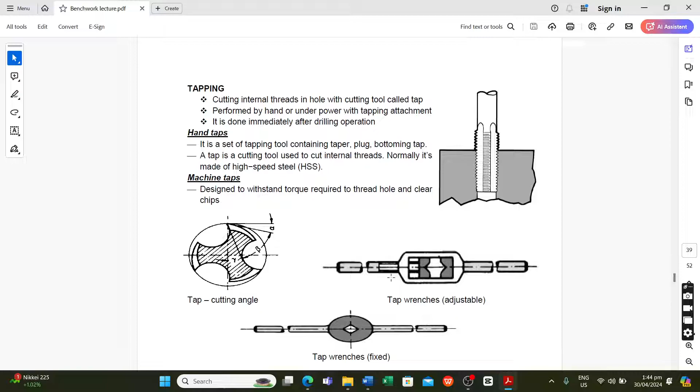Okay, so ang ating topic is all about tapping. Is it visible? Visible siya. Okay. So ang ating idea is when we say tapping, it is cutting internal threads in a hole with a cutting tool called tap.

So we will use what we call tap and die. In the video presentation that I will share, gagamit tayo ng 3 types of tap: tap number 1, tap number 2, and tap number 3. So syempre, tapping can be done kung meron na tayong existing or drilled holes. Kung meron na tayong nagawang butas through the drill press or electric drill, pwede na tayong gumawa ng tap. So ang purpose ng tap is para magkaroon ng thread, parang rethreading.

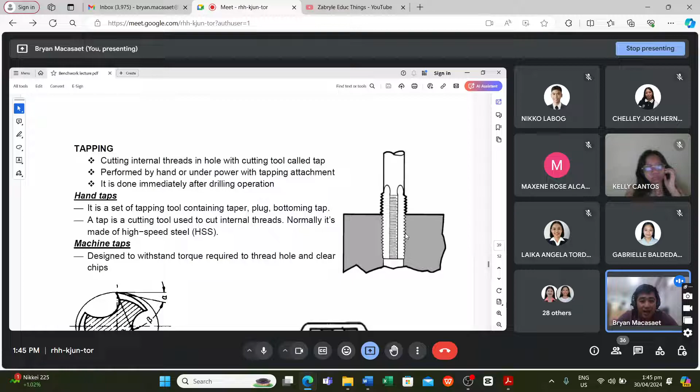So it is performed by hand or under power with tapping attachment. Also, it is done immediately after drilling operation. So meron tayong hand taps na tinatawag at saka machine taps. Pag sinabing hand taps, it is a set of tapping tools containing taper, plug, bottoming tap. So a tap is a cutting tool used to cut internal threads, normally made up of high-speed steel.

Okay, and then ito yung ating materials na ginagamit. We have the tap cutting angle and the tap wrenches. So if we will compare taps with drilling and countersinking, ito yung itsura.

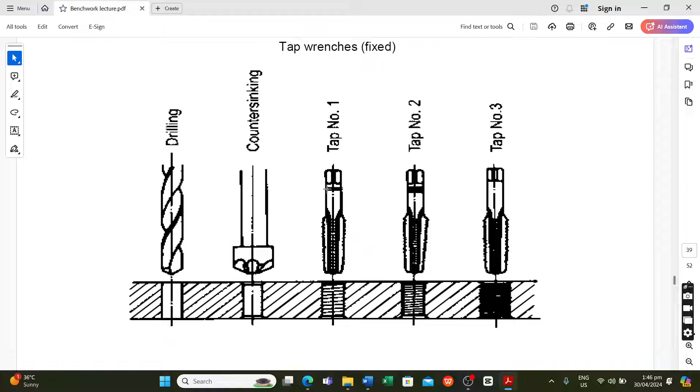Ang purpose ng drilling, syempre, initially is to create the initial hole. And then yung countersinking is the enlargement of the top side of the drilled hole wherein kailangan tayong makapag-form ng conical shape para mag-fit yung head ng ating screw. Yun yung purpose ng countersinking. In tapping naman, we create threads. So as you can see, we have tap number 1, tap number 2, and tap number 3.

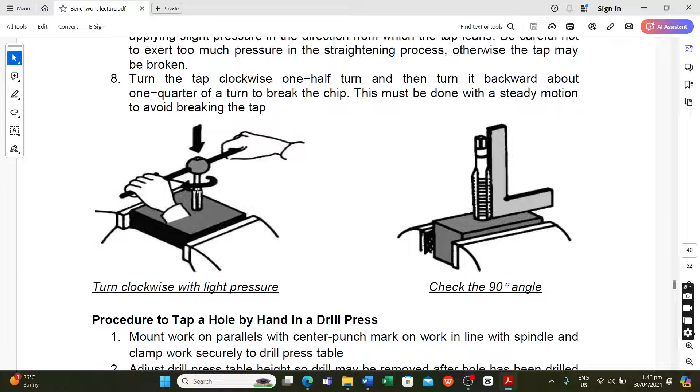So what are the steps in creating hand taps? As you can see in the picture, yan lang yung pinakasimpleng paraan para maintindihan natin kung ano yung tapping. So the first one, we must select the correct size and type of tap for the job. Syempre, kailangan alam natin yung size ng hole, at alam natin yung ating gagawing butas, kung gaano kalaki.

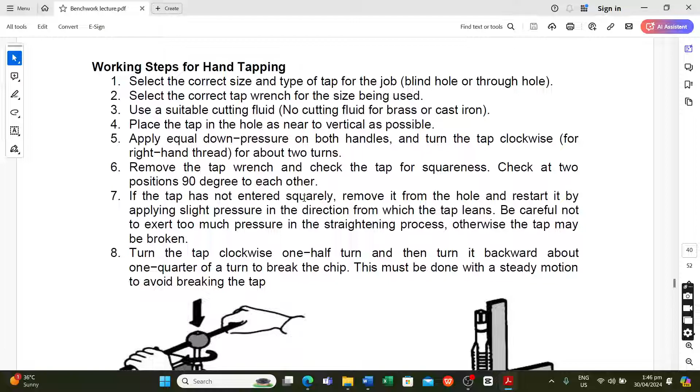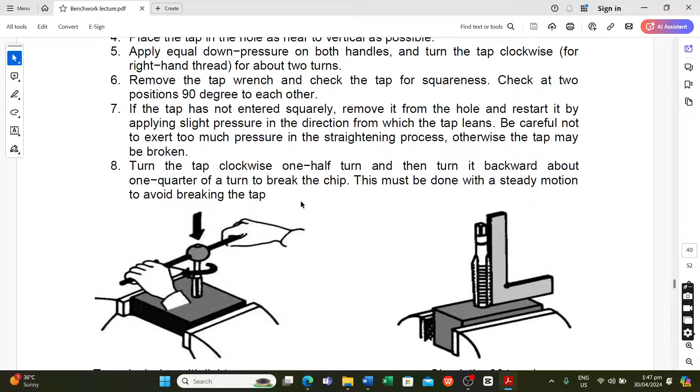Number 2, select the correct tap wrench for the size being used. Number 3, use a cutting fluid. Number 4, place the tap in the hole and apply equal down pressure, ikot-ikot lang pababa, and remove the tap. If the tap has not entered squarely, remove it from the hole and restart. Then, turn the tap clockwise half a turn and turn it backward about a quarter of a turn to break the chip. This must be done with a steady motion to avoid breaking the tap.

So ito yung ating proseso. Turn clockwise with light pressure, paulit-ulit, para magkaroon ng thread. And then you will check the angle of the tap para ma-sure natin na tama yung ating procedure ng pagtatap, at saka naka-align siya. Okay po?

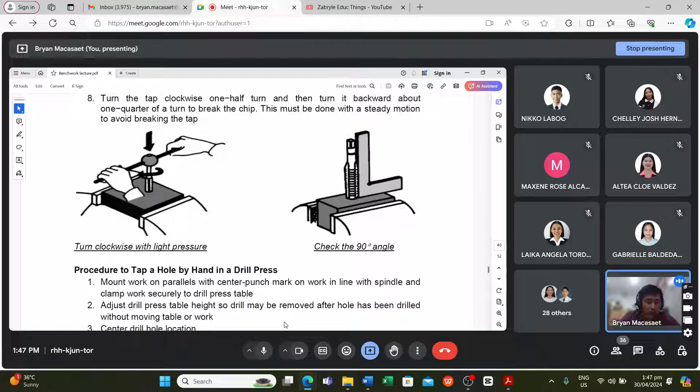So in order for us to truly understand what is tapping, I will share you a video presentation.

May audio po ba? May audio? Meron. Okay, sige. You can interrupt me kung walang audio.

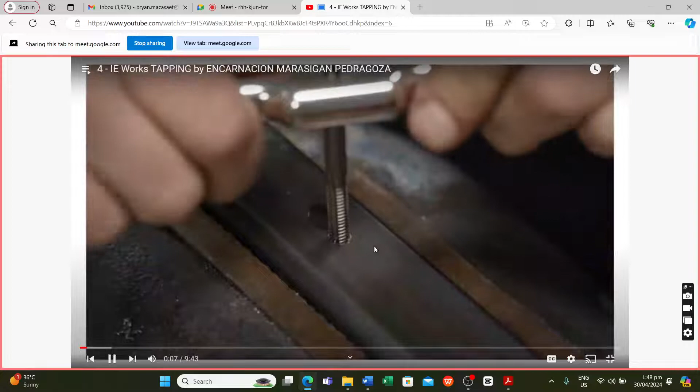Magandang buhay everyone! I am Shaina Pedragoza, together with Jana and Clarine, and we are here to present to you about hand tapping. But before we start, do you have any idea about hand tapping, its purpose? Okay, so even if some of you don't have any ideas, I want you to listen and pay some attention.

So let me start by giving you some background information about the history of hand tapping. During the 18th and 19th centuries, metalworking taps, also known as tapping, were frequently created by their users, especially if the user was proficient in toolmaking, utilizing instruments like lathes and files for the shaping and smithing of the hardening and tempering.

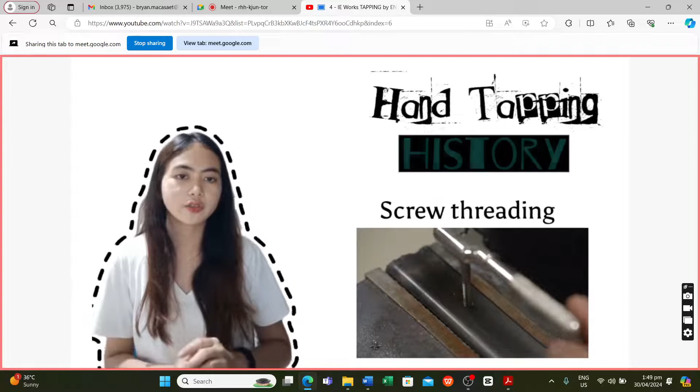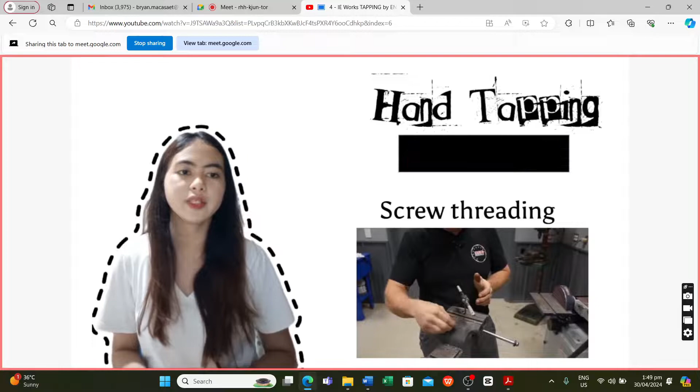Screw threading, sometimes known as tapping, is a process that uses dies and taps. Some are shaping tools, while others are cutting tools. The female half of the mating pair, or a nut, is cut or formed with a tap. The male half of the mating pair, or a bolt, is cut or formed using a die. Also, tapping refers to the use of a tap to cut or produce threads.

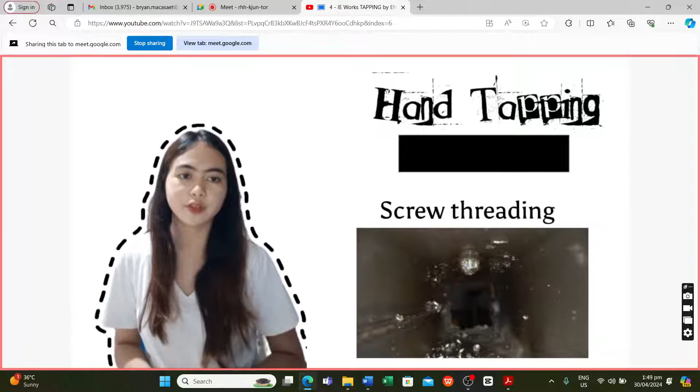Alamin natin ngayon kung ano ang tapping. Tapping is the process of cutting a thread inside a hole so that a cap screw or bolt can be threaded into the hole. Ang tapping ay ang pagbubutas kung saan gumagamit tayo ng tinatawag na tap o thread tap.

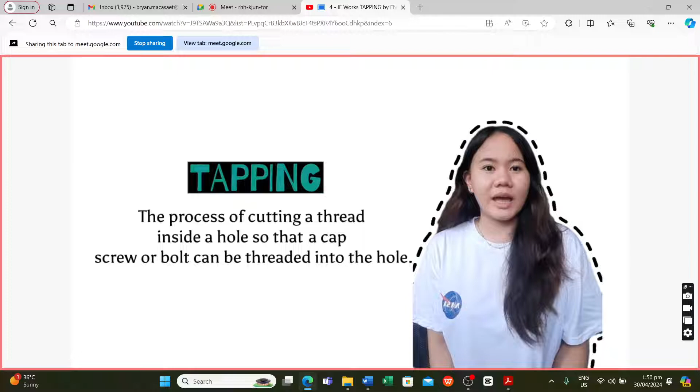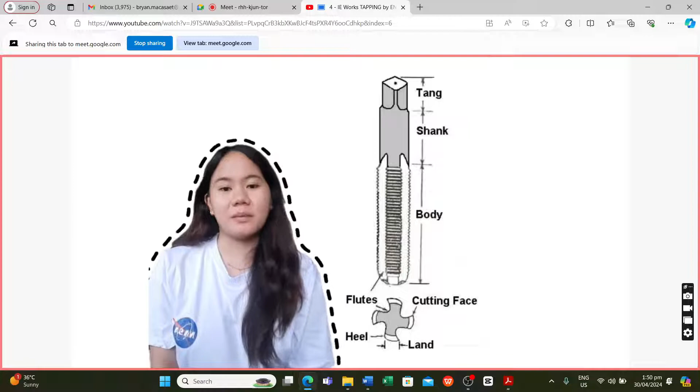Ano nga ba ang thread tap? Ang thread tap ay ang tool na ginagamit sa tapping. Let me show you the parts of a thread tap: tang, shank, body, then sa dulo ay flute, heel, land, and cutting face. Sa body, yun yung ginagamit para makapag-cut sa loob ng butas.

Meron tayong dalawang uri ng paggamit ng tapping: ang hand tapping at ang machine tapping. Ano nga ba ang pinagkaiba ng dalawa?

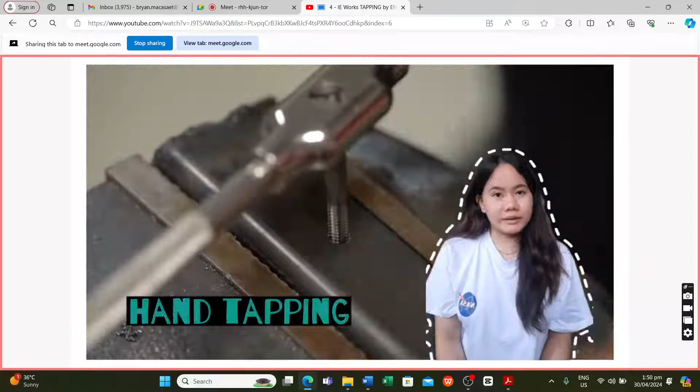Hand taps are usually 2 or 3 taps. Ito ay gawa sa alloy or carbon steel at nagkakaroon ng hugis na square sa pinakadulong bahagi ng tap. Hand taps are made in sets of 3: meron tayong taper tap, the plug tap, and the bottom tap.

The bottom taps ay nagkakaroon ng 1 to 2 chamfered threads around 18 degrees per side. Ito ay ginagamit sa pinakaunang part ng tapping, nagpuproduce ng threads close to the bottom of blind holes.

The second one is the plug tap. Ito naman ay nagkakaroon ng 3 to 5 threads with 8 degrees per side. Mas malalim ito kumpara sa bottom taps.

Then the last is the taper tap, which has 7 to 10 threads at 5 degrees per side, at ito ang pinaka-finishing ng tapping. High-speed steel - hindi ito katulad ng hand tap na mayroong square end. And ito ang mga thread taps using machine taps.

Siyempre, bago maganap ang tapping, may mga bagay tayong kailangan gamitin.

Center punch. Ito ay ginagamit to start a hole, o pwede natin sabihin para makapag-mark ng point na susundan ng pagbubutas.

Hand drill. Siyempre, dahil hand tapping ang gagamitin natin, kailangan natin gamitin ang hand drill. We need to drill the mark point to start a hole followed by a thread tap.

Tap and die set. Ang tap and die set ay naglalaman ng mga sizes and types of thread taps and thread dies. But we need only one thread tap na may correct size sa drill bit.

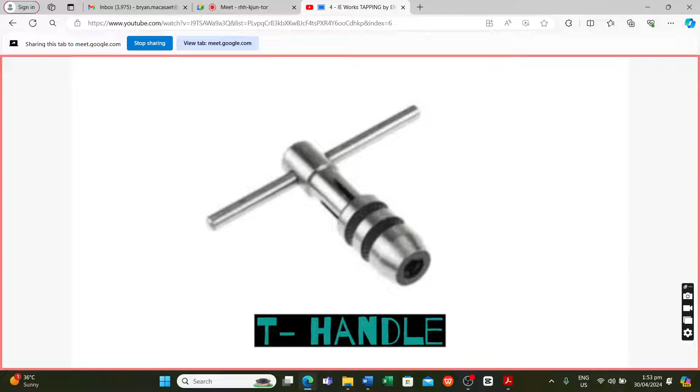T-handle. T-handle allows you to turn taps and help make screw threads. Karaniwang ginagamit dito ay ang adjustable tap handle para sa mga sizes ng thread dies.

Fluid. Ang cutting fluid na required ay yung mas suitable. And remember, ipinagbabawal ang paggamit ng mga cutting oil sa brass at sa mga cast iron.

Gloves. At syempre, hindi mawawala ang safety sa paggawa ng tapping. Kailangan natin gumamit ng gloves to protect our hands from risk.

And now, we will be discussing the working steps or process for hand tapping. First, we need to select the correct size and type of tap for a job, whether it is blind hole or through hole. Second, select the correct tap wrench for the size being used.

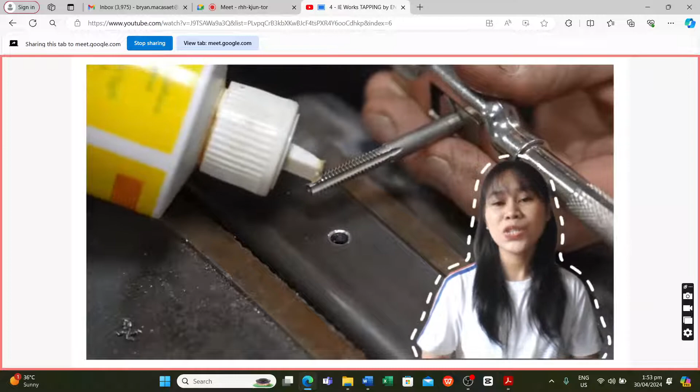Next, use a suitable cutting fluid because by using cutting fluid, we can lessen the possibility of overheating.

Then, place the tap in the hole as near to vertical as possible. Ilagay natin yung tap sa butas at i-position natin nearly vertical para di ma-deform or masira yung ating bubutasan.

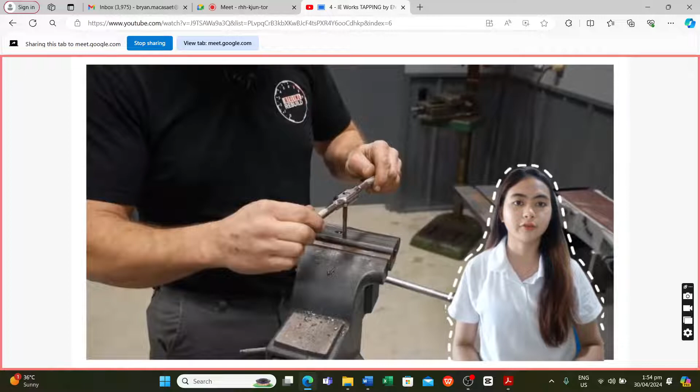Next is apply equal down pressure on both handles and turn the tap clockwise for about 2 turns. Yung i-apply nating pressure ay equal sa both sides ng handle para pantay yung pagbaba ng ating tap. Sa pag-turn ng tap, kailangan clockwise direction and about 720 degrees or 2 turns.

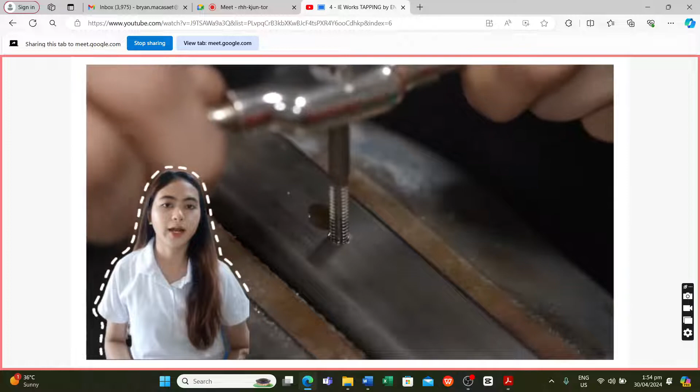Then, remove the tap wrench and check the tap for squareness. Check at 2 positions at 90 degrees to each other. Sa pag-alis ng tap wrench ay kailangan natin suriin ang tap para sa squareness sa pagkakapantay nito. Kailangan din natin suriin sa dalawang side na 90 degrees sa bawat side ng tap.

Next, pagkatapos masukat ng 90 degrees, maaari na natin isagawa ang pagbubutas.

Sa pagtatap na ito ay dapat dahan-dahan dahil maaaring masira ang thread tap. Kailangan nating lagyan ng konting cutting fluid, then gamit ang T-handle, dapat maayos at straight yung pagpupush pababa sa tap.

After itong mapush paikot, kailangan mong malaman na kailangan mo ring pull back para matanggal yung mga excess na thread sa loob, para mas mapabilis at mapalalim ang butas. Makikita na effective ang paggamit ng cutting fluid dahil mas mapapabilis at hindi maganit ang pagbubutas.

And remember again, don't take too much pressure. Rotate it nicely to avoid broken taps.

Hello guys! It's me, Clarine, and at this moment, we will talk about the tips for hand tapping the perfect hole. Threading a drilled hole may seem like a simple procedure, right? But plenty can go wrong if we don't take the proper precautions with using hand taps. So for now, I'm gonna share with you some tips to ensure a smooth and nice taps every time.

So what are you waiting for? Let's start! Number 1. Know the drill. Store taps with their matching drill bits to ensure you use the right tap for a fastener. Holes that are too large can result in too shallow threads that can strip or fail to engage the fastener sufficiently. Otherwise, if the holes are too small, it can bind the tap or chip it by forcing it to remove too much material. So it's really important that we are aware of how to use conversions and tap or drill charts to calculate the correct hole size.

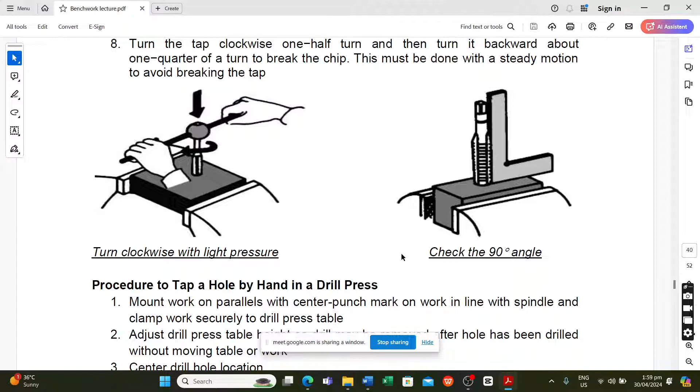From the video presentation, I think it's very clear, as discussed by Miss Pedragosa. That was the last video presentation output of the last batch, 2022-2023. It's one of the best presentations recorded. Next year, your output will be the one I play for the next batches, so I'm expecting it to be even better.

In the presentation, we discussed tips and procedures on how to use taps, and also the types of taps: initial, secondary, and final tap. We also discussed the use of taps and dies, techniques, etc.

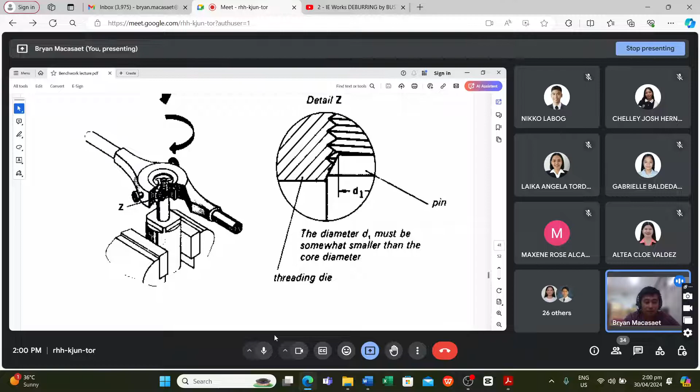The threading with the hand die working steps was also discussed in the video presentation.

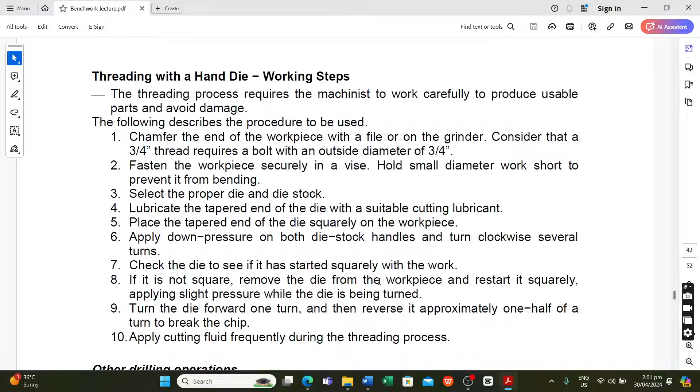After that, tapping—do you have any questions or clarifications? Nico, any questions or clarifications? None, sir. Okay, is tapping cleared?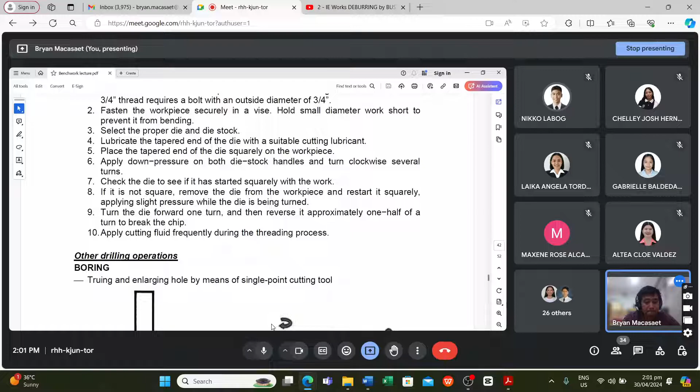Okay, we will now proceed with the next topic, which is boring.

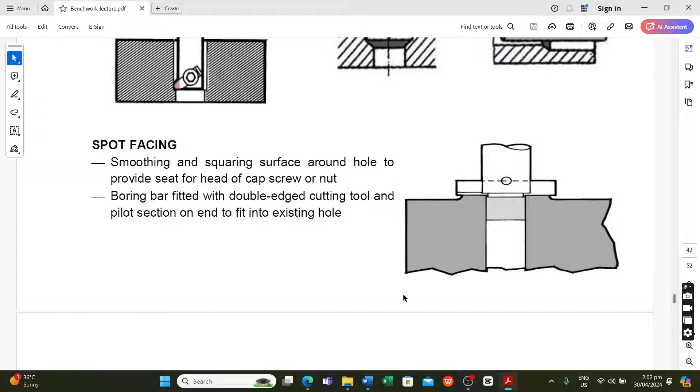Next is what we call spot facing—that is smoothing and squaring the surface around the hole to provide a seat for the head of a cap screw or nut. The boring bar is fitted with a double-edged cutting tool and a pilot section on the end to fit into the existing hole.

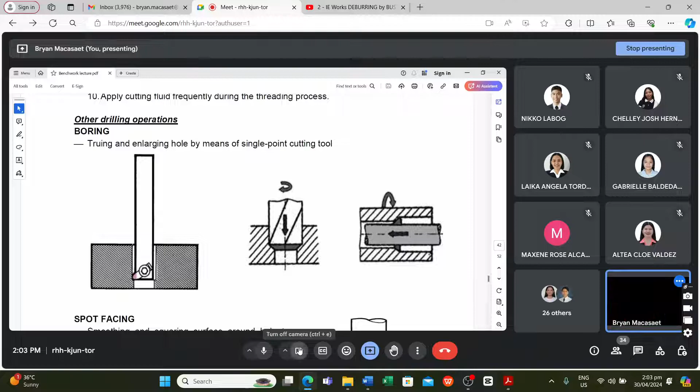Boring—what do we have here? High cholesterol? Drink Del Monte Heart Smart with Red. Okay, let's skip the joke. Here, wait... audio, there's audio.

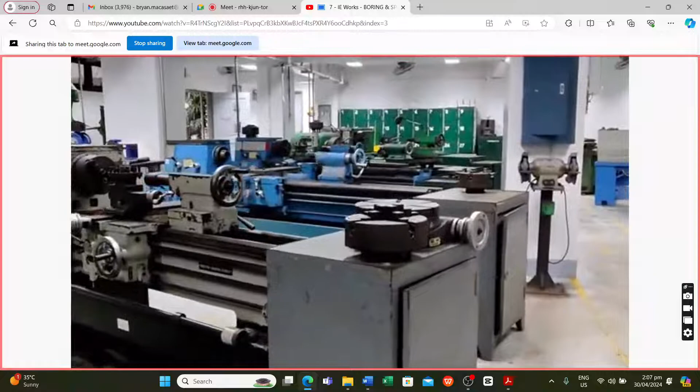We're here at Mectec Group to officially start our mini vlog about drilling operations. Kung boring ka at na-spot na tong video na to, keep on watching! At alam niyo ba guys, there are many different kinds of drilling operations. Pero nakafocus lang tayo sa dalawa, at yun ay ang boring at spot facing.

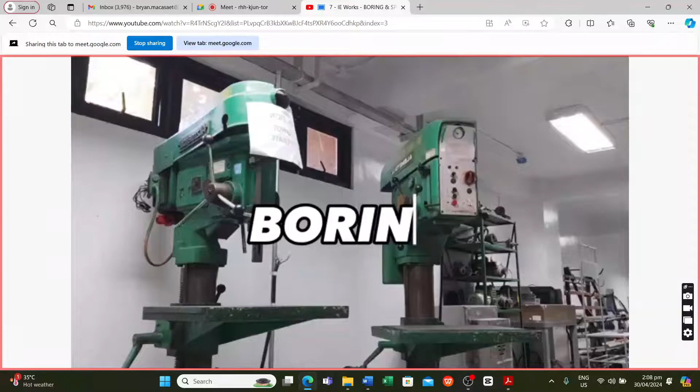Nakikita niyo ba yan? Yung machine. Isa sa mga ginagamit yan para sa boring at spot facing. Ang tawag dyan ay drill press. May confusion pagdating sa drilling at sa boring dahil yan. Pero, bagamat may confusion doon sa dalawang yan, ay may different purposes naman ang bawat isa.

Ang drilling ay nag-create siya ng hole. Siya yung nag-start para mag-create ng hole sa isang workpiece o sa isang bagay. At ang boring naman, yun yung nag-e-enlarge ng butas sa isang pre-existing hole. At isa pa, ginagamit ang boring para to create a closer depth tolerance at saka higher quality para mag-finish ang isang hole. Ang focus natin ngayon ay ang boring.

May dalawang pangunahing uri ng boring operation: ito ay ang roughing at finishing. Ang roughing ay nagpapalaki ng isang butas sa pamamagitan ng pag-alis ng malaking bahagi ng metal para ihanda ang butas para sa finishing. Ang finishing naman ay ang mas precise na process na gumagamit ng mababaw na lalim ng paggupit para mapabuti at maayos ang finishing surface at accuracy ng isang hole.

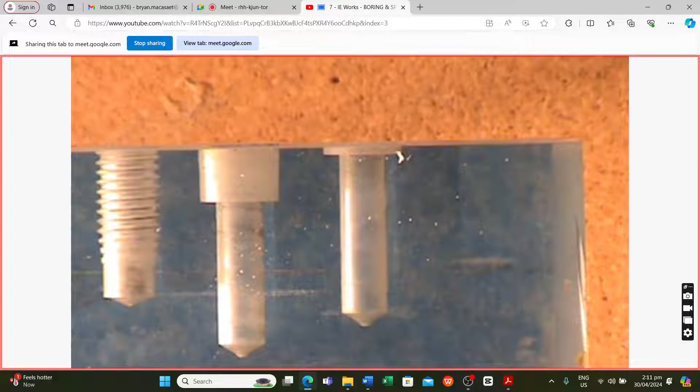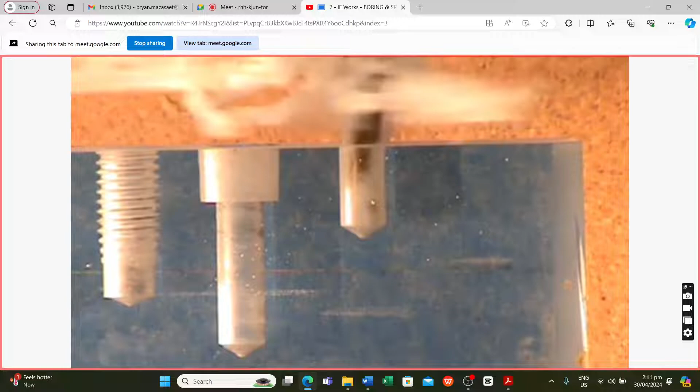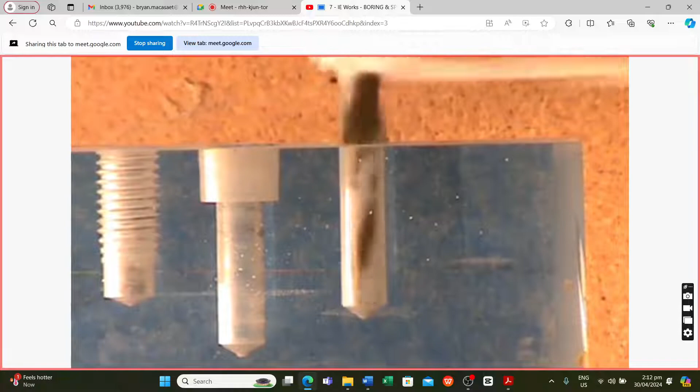Spot facing is just cleaning up the top of a hole to let a fastener sit on it. We're going to start with a center drill, and then we'll use a twist drill, and then we'll use our counterboring tool to actually make the spot face. So just a little spot drill with the center drill, follow that with the twist drill, do some peck drilling, make a hole. Spot facing is used a lot of times on casting when the surface is uneven, to help the fastener sit down level on the top of the surface.

Alam nyo ba that the most common way para gawin yung operation na napanood nyo is with the lathe, also known as the mother of all machines. Ito ang itsura ng lathe machine. It can also be done with the milling machine, which is the appropriate tool for spot facing.

And that's it for this vlog. I hope you guys learned something.

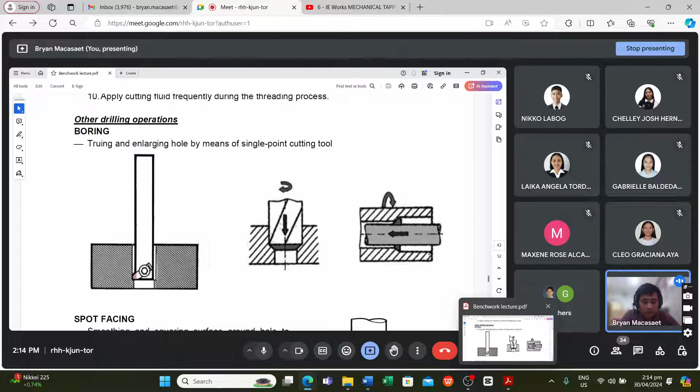Okay, so let's continue. If you have no more questions, let's go with sharpening tools. So when we say sharpening, it means patatalasin, or pagpapatalas. For some tools, it is important to keep them sharp at all times, since no one would want to use a dull tool. So common tools such as scribers, center punches, chisels, drill bits, tool bits for lathe machines need to be sharpened every time you feel that they do not cut well.

So one tool for sharpening tools is what we call bench grinder. So bench grinder or pedestal grinder, wait lang.

Okay, the bench grinder is used for sharpening of cutting tools and the rough grinding of metal. Because the work is usually held in the hand, so this type of grinding is sometimes called offhand grinding. The bench grinder is also mounted on the bench, meaning it is stationary on a table. While the pedestal grinder, being a larger machine, is fastened to the floor.

Both types consist of an electric motor with a coarse abrasive grinding wheel for the fast removal of metal, while the other is fine abrasive for finishing grinding. So, you can see the two heads of the bench grinder - one is very fine, the other is very rough. One is for finishing, the other is for sharpening. Is that clear?

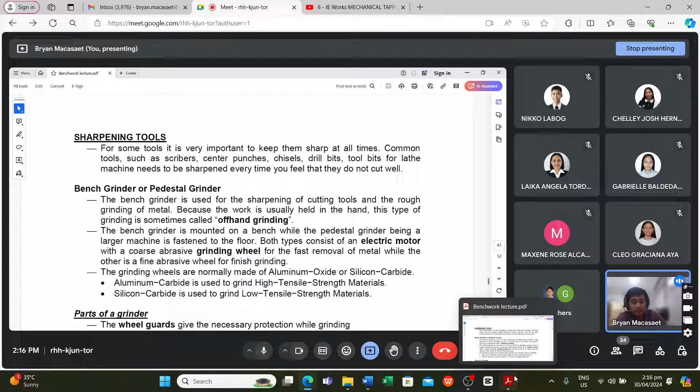Okay, so we have the wheel guards - from the word itself, wheel guard. The wheel guards give the necessary protection while grinding. And then we have the tool rest, which provides a rest for either the work or hands while grinding.

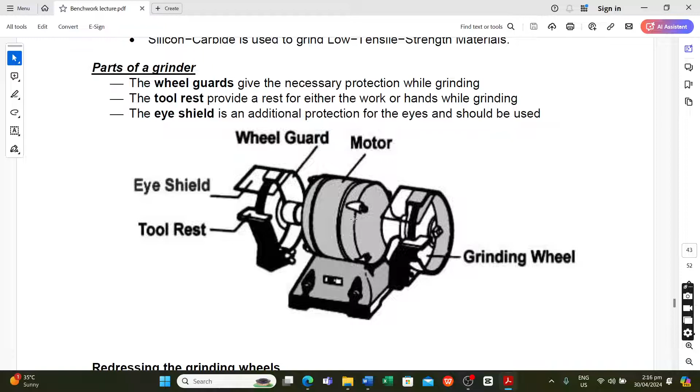And then our eye shield is an additional protection for the eyes and should be used. And then this is our motor - of course, this is what drives it to rotate. And then we have the grinding wheel.

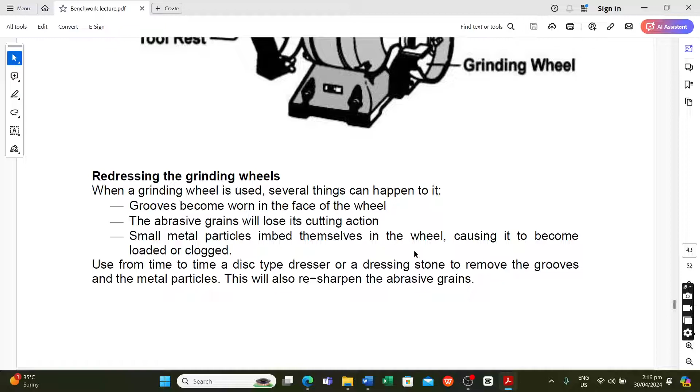Next, redressing the grinding wheels. When a grinding wheel is used, several things can happen to it. First, grooves become worn in the face of the wheel, and the abrasive grains will lose their cutting action.

Small metal particles embed themselves in the wheel, causing it to become loaded or clogged. Use from time to time a disc type dresser or a dressing stone to remove the grooves and the metal particles. This will also resharpen the abrasive grains.

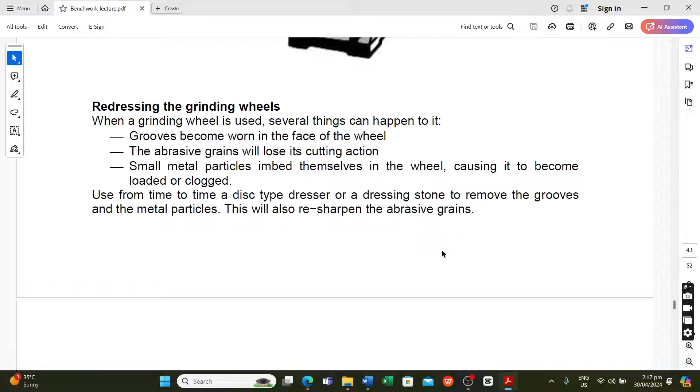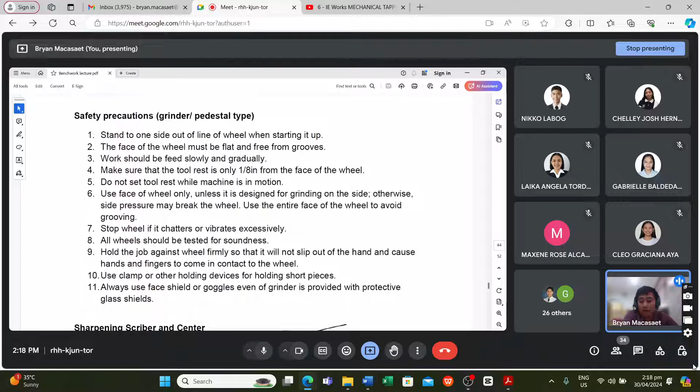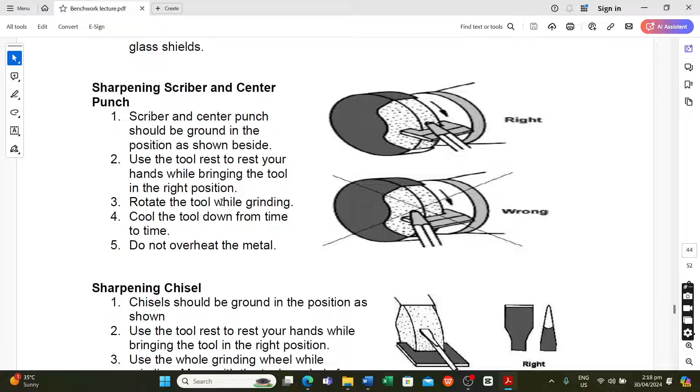Okay, so this is sharpening the scriber and center punch. As shown in the picture, the scriber and center punch should be ground in the position shown. Use the tool rest to rest your hands while bringing the tool into the right position. Rotate the tool while grinding, and cool the tool down from time to time so you do not overheat the metal.

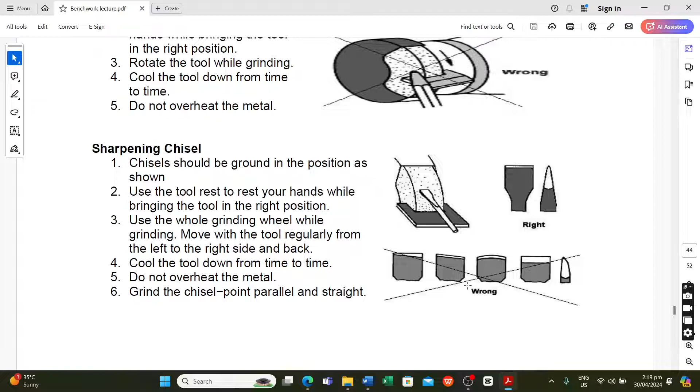For sharpening a chisel, as shown in the picture, that's how the blade should be positioned. You should be at the tool rest so that chisels are ground in the position shown. Use the tool rest to support your hands while positioning the tool. This is the right way, these are the wrong ways — sharpen evenly on both sides. Use the whole grinding wheel while grinding, and move the tool regularly from left to right, side to side. Cool the tool down from time to time, do not overheat the metal, and grind the chisel point parallel and straight. That's it for the bench grinder.

So let's have a video presentation again. Wait a moment.

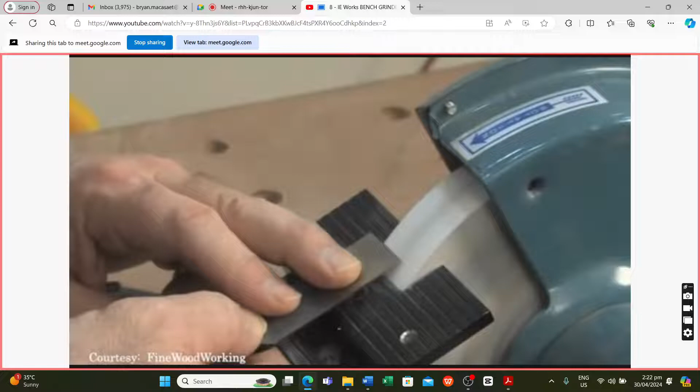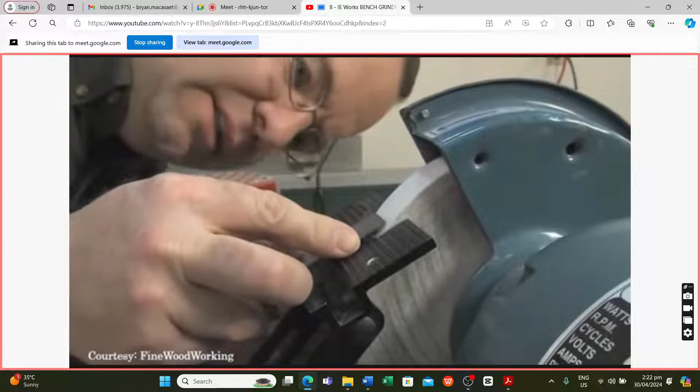This is used to sharpen or smooth whatever object you want. Then this is the tool rest — adjust it slightly, get down low and take a look. You want the wheel to hit the bevel about halfway along its length. What you can do is slide it up to the wheel when you think you're close, and rub it back and forth. This is where you rest the object you want to sharpen or smooth while grinding it on the grinding wheel. That's what it looks like when you're smoothing or sharpening something.